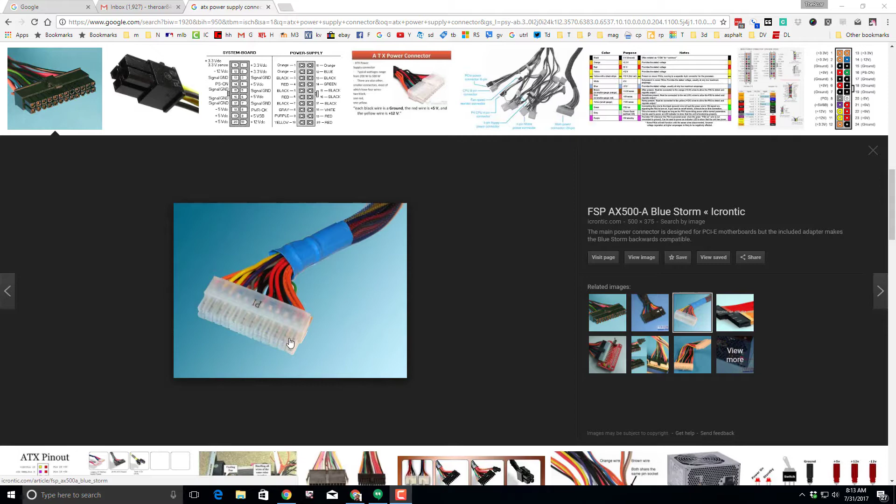I have a power supply that I want to jump a green and a black wire with a paperclip, but I also want a protective covering. So I'm going to use Tinkercad to 3D print a cap that goes over all of the pins.

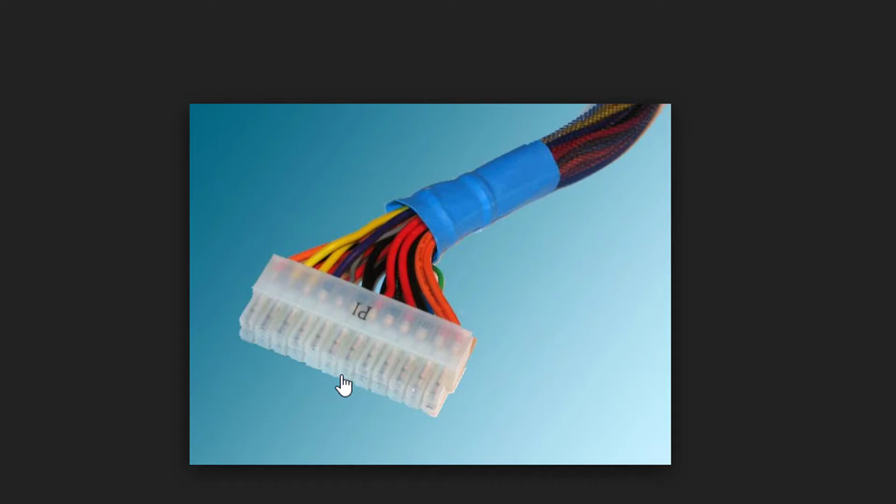But it will also house my paperclip that jumps it so the power comes on when I want. The first thing I've determined is that the box is approximately 41.7 millimeters, so I'm going to put 42, and it's almost 8, so I'm going to put that for my measurement.

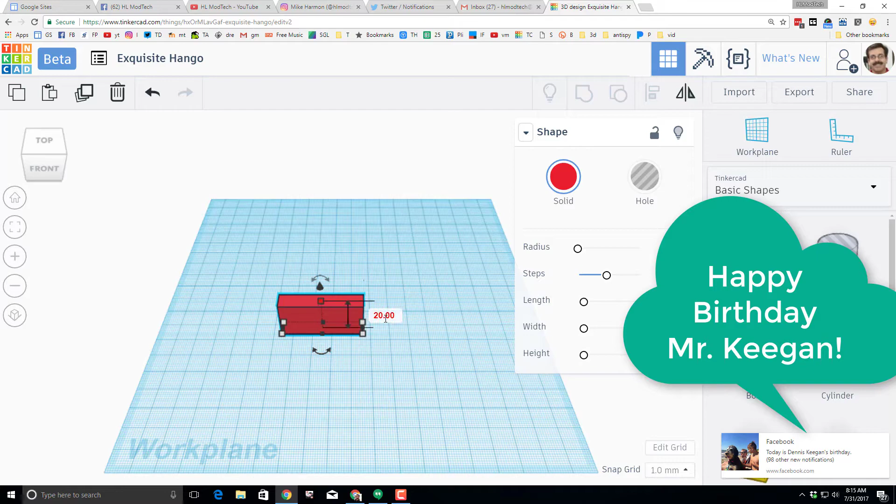And the pins have 9 millimeters approximately of travel, so that's how far it's sticking up. The little pins are approximately 3.3 millimeters across, and these are the square blocks, not the metal inside the square blocks.

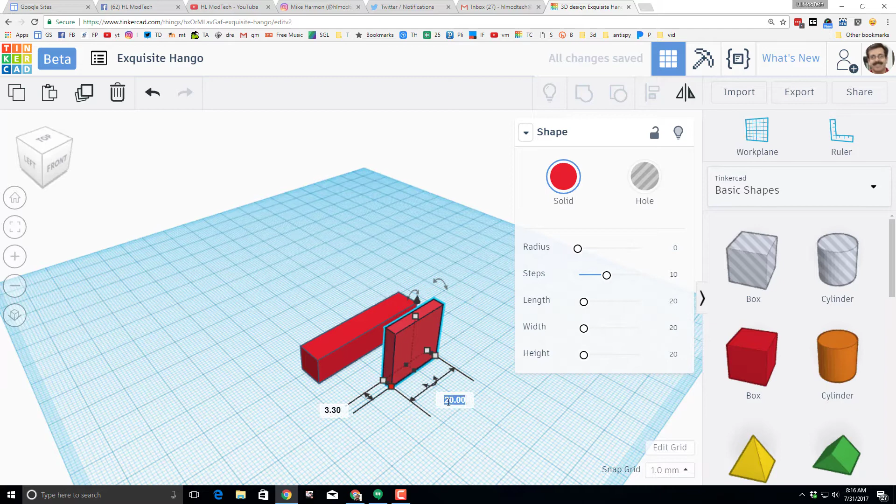And those will have to be holes. Let's see if they will line up so I can put 2 of them in here.

And I just did some looking, I'm going to adjust this. It's more of 7.4. And I want to align these with the very ends.

So I'm going to grab just those 2, and I'm going to hit align. And I want it to be top left corner.

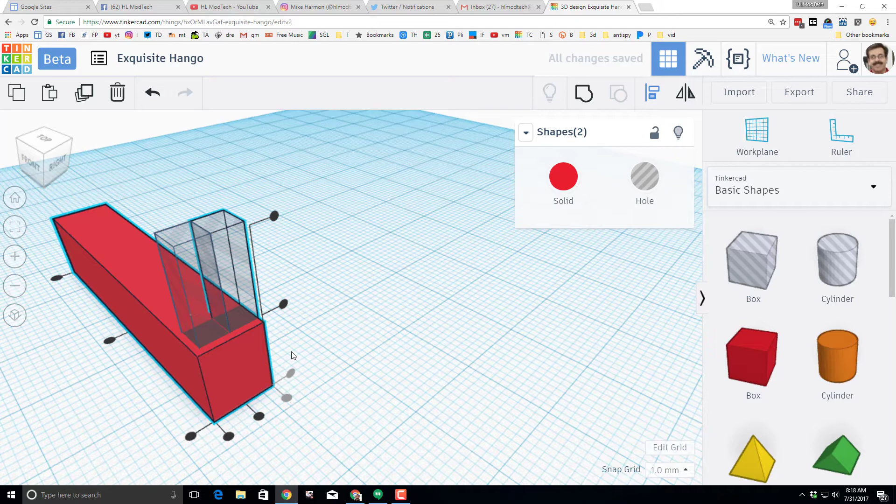And then I'm going to take this one and hold down Shift and select it, and align it for bottom left corner.

Let's set our grid for 0.1. Let's shrink these down to that 9 millimeters because that's how far I want these to sink in. And we'll use these as a template to cut out.

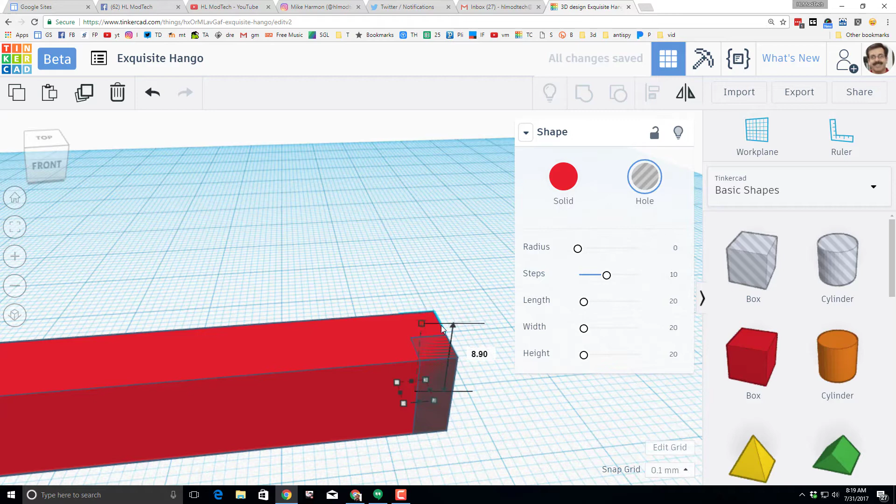So I'm going to hold Shift, I'm going to hide this for a moment, and do Control D. I want to move them over so they're even, and then I'm going to go 1 millimeter away.

And then I'm going to just print a test version to see if it works. So this is going to be a guess and check project.

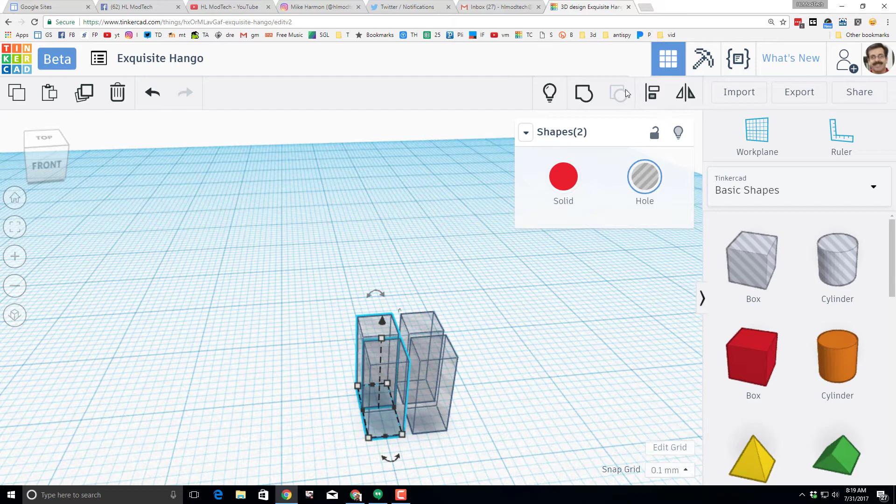Let's bring everything back. Let's select this guy and do Control D. We'll move him out and make this one larger. Let's go 8 millimeters.

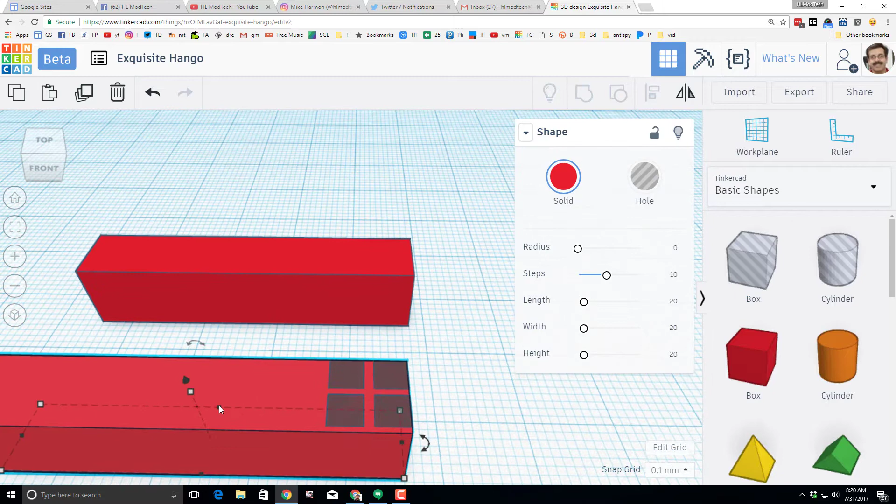We'll just move it because I don't really care, I'm just testing to see if my theory works. But I do want to make it shorter, because why print the entire project when I can just test.

Let's clear that out. Let's group my little pins and let's do a print test and see how this works out.

Now we can do an align. So that's all lined up too.

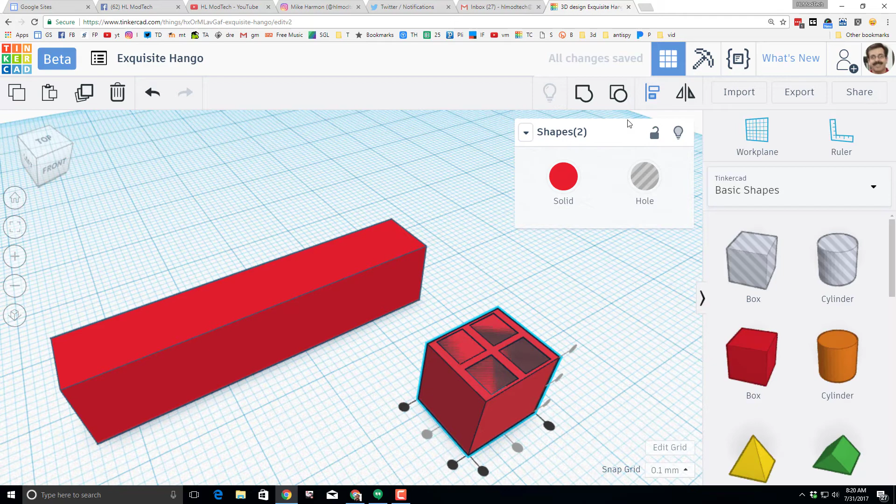So this is how I start a project like this. Let's see what kind of smart choices I made, and let's see what kind of goofy choices I made as well.

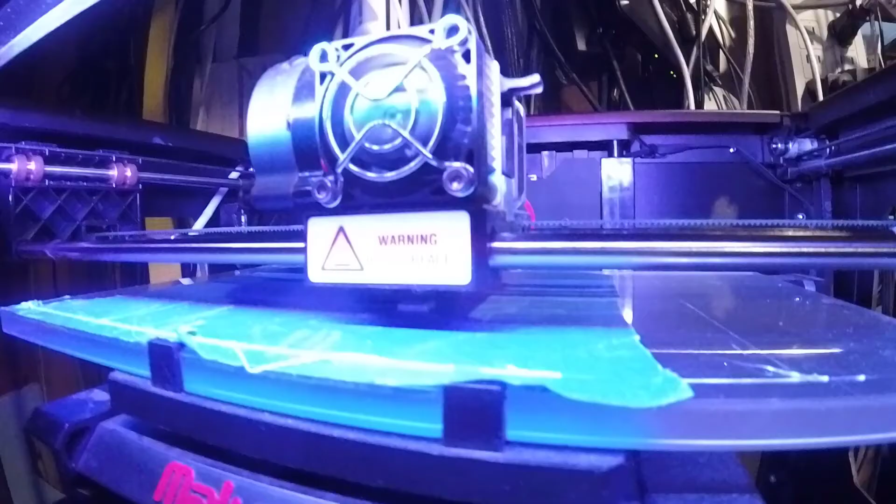That's the most amazing thing, is how quickly you can go from your screen to having something to check out and see if it works.

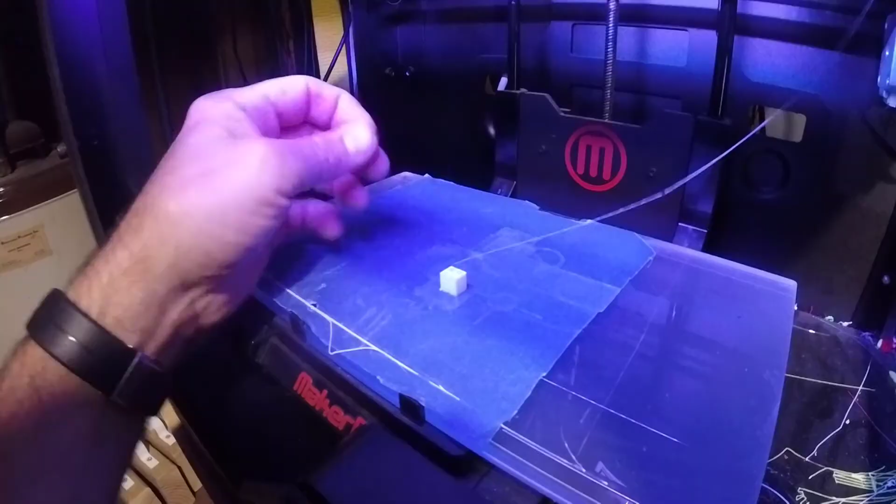Alright, let's go do a test. Let's see if we measured correctly. And that would be no.

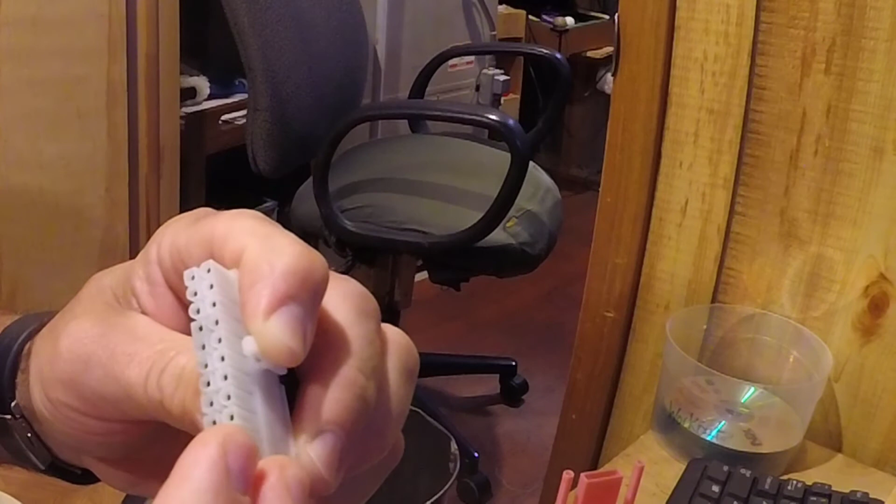So that's the cool thing, is that you can adjust and try again, and it only takes a few minutes to give it a shot. Let's see what happens in the next video.